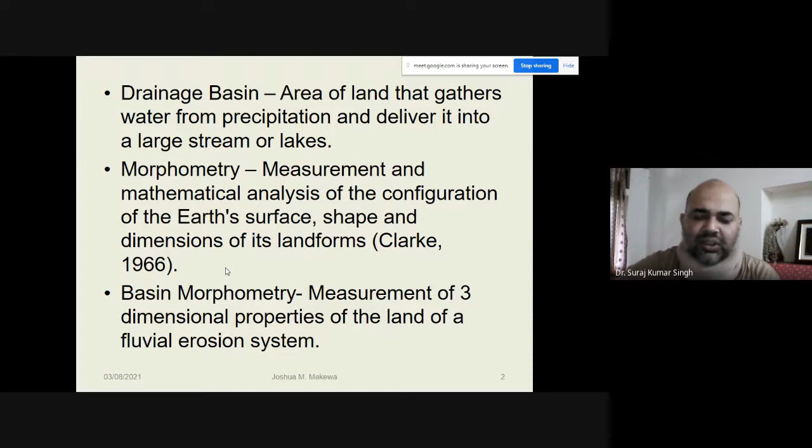So the variables that are very important to be studied in drainage morphometric analysis start with the stream order. Stream order is the number of smaller streams which are connected to the major stream or the main stream. Then the next variable is stream length. Stream length is the total length of streams, whether they are minor streams, tributaries, or the mainstream. We'll be calculating the entire length of each and every feature.

Then comes bifurcation ratio, where we'll be dealing with the number of streams of each order available in a particular river system: how many streams have stream order 1, 2, 3. Then we'll be calculating the stream length ratio, basin length, valley side slopes, basin area, stream frequency, drainage density, elongation ratio, circularity ratio, form factor, and relief ratio.

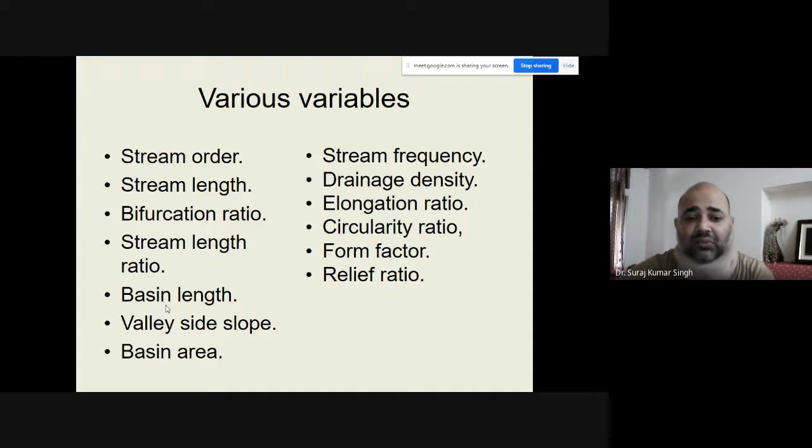These are the different variables that have to be analyzed in order to understand the drainage morphometry of a river basin. We'll be going into detail about the different kinds of variables in the coming slides.

Now, the morphometric features can be divided into three types. All these variables we stated in the previous slide can be divided into three categories. The first category is linear properties, which are in line, and those features are one dimensional. Then you have areal properties, which are two dimensional. And finally, the relief property. Relief means topography, means height. Whenever there is a height, apart from x and y, you need a z. That's why it is represented as 3D, or three dimensional.

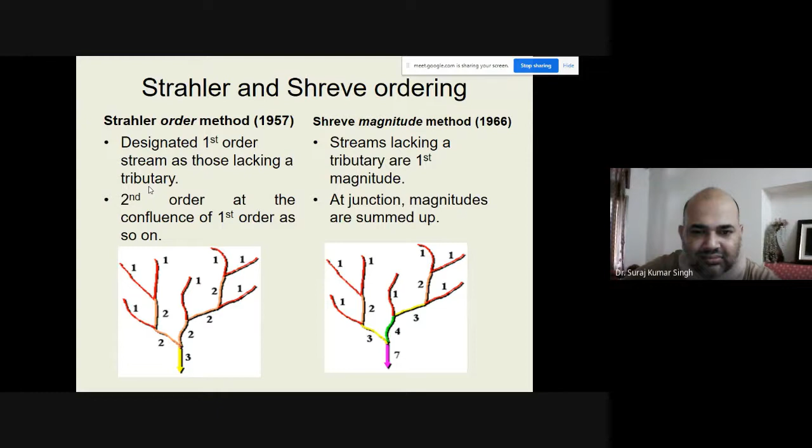Now we have provided order. Order is providing the name to each and every stream. How is the ordering done? Whenever two streams of the same order meet, it gets converted into the next order. If there is a lower order, you continue with the higher order. And whenever the same orders meet at a place, you convert that into the next order. That is the way you provide names to the stream orders.

Now stream numbers. What do you mean by stream number? Stream number means the total number of stream segments present in each order. For example, using the Strahler system, take order 1. We calculate the total number of order 1: 1, 2, 3, 4, 5, 6 and 7. So order 1 has 7 streams in total.

Now we'll go for order 2: 1, 2, 3, 4 and 5. So order 2 has 5 streams. Now order 3 is 1 stream. So whenever I check anybody's work, I can evaluate whether he has calculated perfectly or there is some misclassification. How will I judge it?

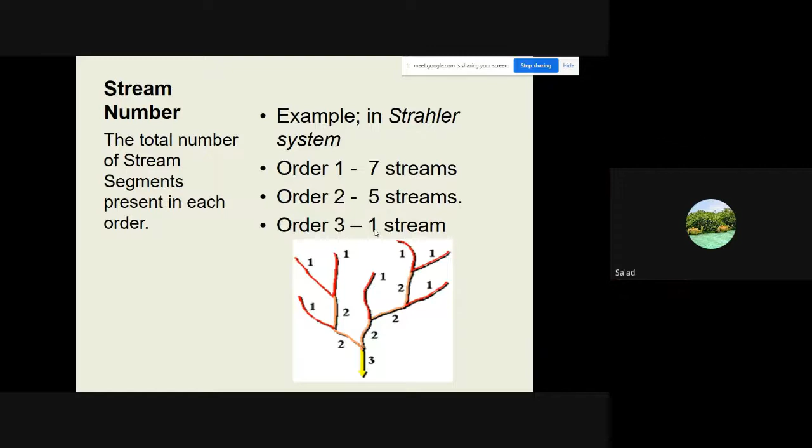Now comes stream length. Using remote sensing and GIS, we can calculate this length. Whenever you are tracing, mapping or digitizing it, as you have provided the projection system and the measuring unit, whether meters or kilometers, each and every length of each and every order is directly calculated using GIS software.

So using the GIS software, you can easily calculate the total length of stream in a particular order. Now, as we have calculated it, I know the total length of stream for order 1, for order 2, for order 3, and so on, until each and every stream is classified.

And what does it suggest? It reveals the surface runoff characteristics. So the prime focus for doing such kind of analysis is that during the rainfall, near to your houses, you will see something like a river flowing. There is a lot of water coming, and post monsoon there is no water. So what is that? That is excessive water that is beyond the carrying capacity of the land, and that is

denoted as runoff. Now because our population is increasing, because we are creating more cemented surfaces, this runoff has to be preserved. If you do not preserve this runoff, it will go and meet the oceans and your water table will not get recharged. So in order to get a recharge, you have to know the runoff characteristics.

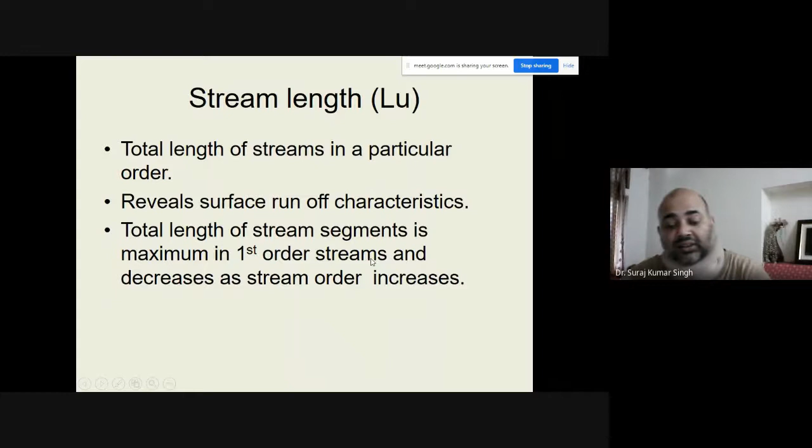For example, what is the total number? That is 7. And if the length is 11 kilometers, we'll be dividing that by that unit. So you will get the mean stream length of each and every order. Now the next calculation that we have to do is length ratio. So how will you calculate this length ratio? The length ratio means the ratio of the mean length that we have already calculated for one order to the next lower order of a stream segment.

So the formula here is the ratio of the mean stream length of one order to the next lower order. Means the stream length of order 2 will be divided by the stream length of order 1. This variation in sub-basins may result from the change of slope and topography. So here RL denotes stream length ratio. The formula is total stream length of order U by total stream length of the next lower order.

So you will take the stream length of order number 2 divided by the stream length of order number 1. Then the stream length of order number 3 divided by the stream length of order number 2. Getting it? Yes? Yes, sir. Anybody? Understood? Yes, sir.

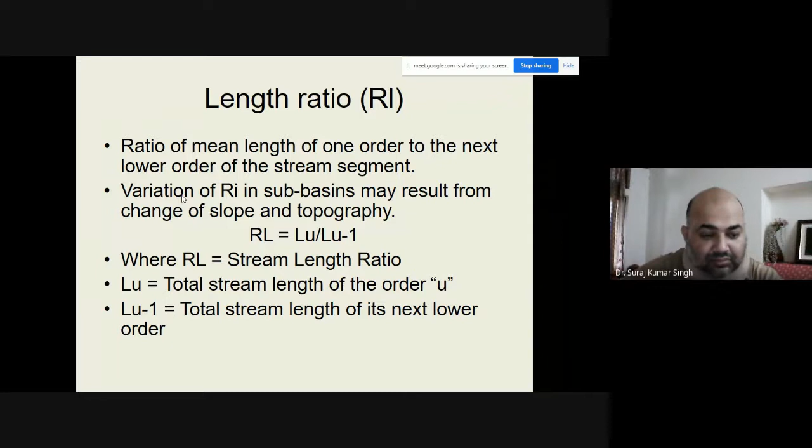Okay. Now next is bifurcation ratio. It will be clearer in concept when we do some exercises related to drainage morphometric analysis. So how is this bifurcation ratio calculated? This is the ratio between the number of streams in one order to the next higher order. So as we have done, we'll be dividing 7 by 5, 5 by 1. This is the meaning of bifurcation ratio: the ratio between the number of streams in one order to the next higher order.

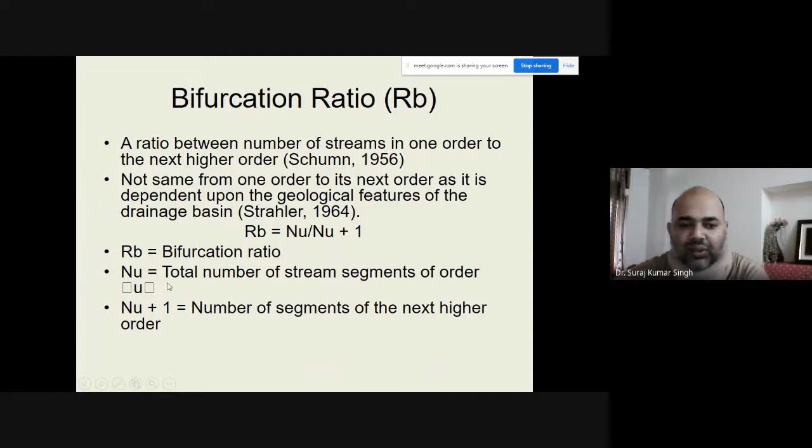It is not the same from one order to the next, and it depends on the geological features of the drainage basin. So what is the formula adopted for bifurcation ratio? That is the total number of stream segments of an order divided by the number of segments of the next higher order. Like, this will go back again to 7 by 5, 5 by 1. Getting it? Now this is how we'll be calculating it for the different stream orders.

So for calculating the bifurcation ratio, it is the number of streams of one order divided by the number of streams of the second order. So what was the number of streams of first order? That was 7. Now what is the number of streams in the second order? 5. So the answer is 1.4 for first order to second order. Now from second order to third order, what is the bifurcation ratio? That is 5 divided by 1, that is 5.

Now when it comes to mean bifurcation ratio, what do you have to do? You have to take 5 plus 1.4 divided by 2. Mean means average. So the total is 6.4, and the average will be 3.2. So the mean bifurcation ratio for the current example will be 3.2. Getting it?

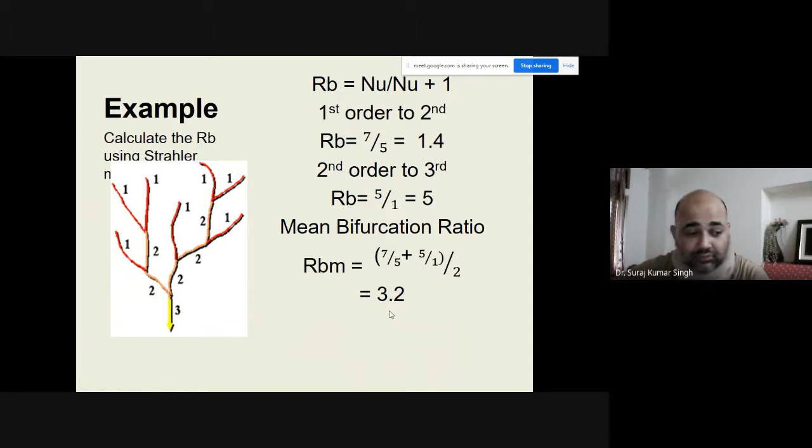Understood? Yes, sir. Yes, sir.

Now these were the properties that were made for linear properties. Now we'll be studying the areal properties of the different drainage basins. So what is the areal property? Areal property is related to the area. So whenever you are going for areal property, first you have to delineate the drainage area, that is AU. So what is the drainage area? That is the entire area drained by a stream or system of streams such that all stream flow originating in an area is discharged through a single outlet.

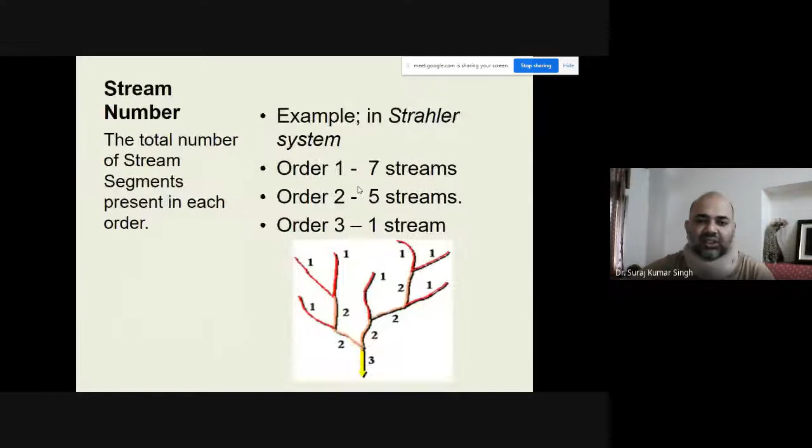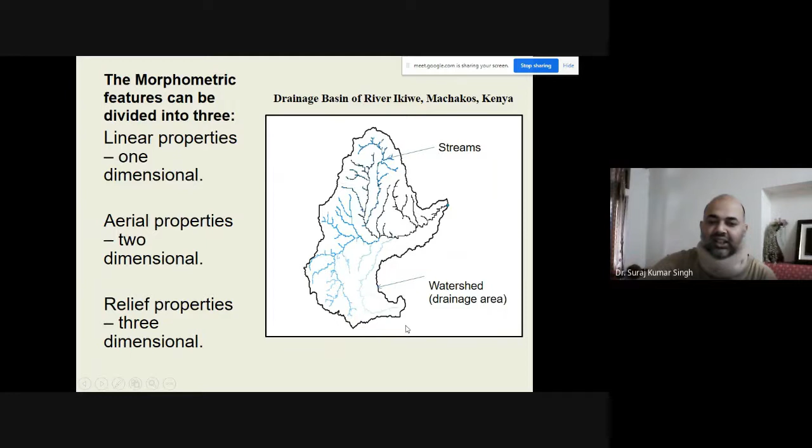Now what is this? I'll go again to this figure. This is the outer boundary that we have created. So this is what we are trying to calculate in areal. This is the area that has to be delineated, and this is known as drainage area. Okay, got it? So we'll be calculating the drainage area first, then we'll be calculating the drainage density. So drainage density is the expression of closeness of spacing of channels.

So whenever flood pictures or videos come up from Himachal or Uttarakhand or Jammu Kashmir, and then you see a flood of UP, Bihar, you'll see the intensity of the rivers is quite less in the plain areas when compared to the hilly terrains. That is because the drainage density is very high in Himalayan terrain when you compare that with the plain terrain. So drainage density is the number of streams. The more dense the streams are, the more runoff it will create. The lesser the number of streams, the more spacing, and that's why the intensity will be less.

Now, what does this drainage density provide? It provides a quantitative measure of the average length of stream channels of the whole basin. So the formula we'll be using to calculate drainage density is the total length of streams divided by drainage basin area. So if we calculate that, we can calculate the drainage density.

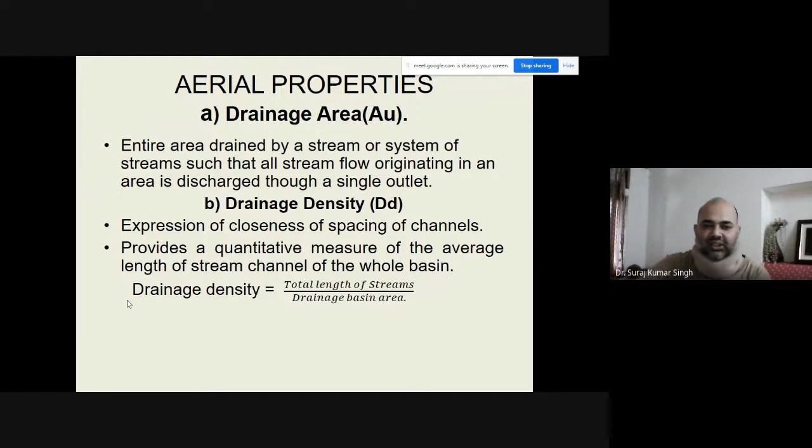Now the third one is stream frequency or drainage frequency. It will be easier to understand. Drainage frequency is the number of stream segments per unit area. Just like you can say population density. So if you say 980 persons per square kilometer and 500 persons per square kilometer, it means the total number of people residing in that given area. So in case the population density is high in any area, if there is a disaster, the damage will be very high where the population density is high, because the number of persons living in that area is high.

In the same way, if the drainage frequency is high, it suggests that the number of streams or rivers generating water is of intense quantity. So the stream frequency formula will be the total number of streams of all orders available in a particular area, per square kilometer. A higher drainage density may imply an increased stream frequency.

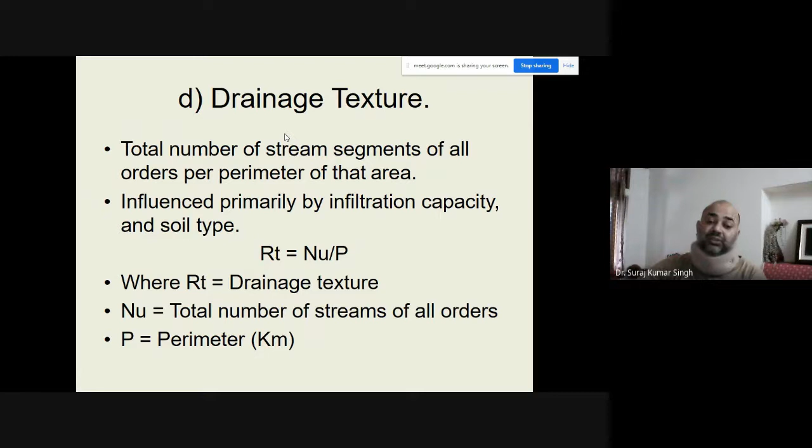Now next is drainage texture. So what do you mean by drainage texture? Drainage texture means the total number of stream segments of all orders per perimeter of that area. So for texture we are not using the area, we are using perimeter, and it is influenced primarily by infiltration capacity and soil type. So the formula to calculate drainage texture is the total number of streams of all orders, 1, 2 and 3 for the current example, divided not by the area but by the perimeter. For drainage frequency we were dividing by the area, for drainage texture we are dividing by the perimeter. Getting it? That is in kilometers, and the previous one was in square kilometers.

Now the next important variables that have to be calculated are circulatory ratio and elongation ratio. So what is the difference between the circulatory ratio and elongation ratio? The circulatory ratio is a quantitative measure for visualizing the shape of a basin. By seeing the shape, you can visualize the shape of the basin, whether that is a round shape, whether that is a triangle shape, whether that is a

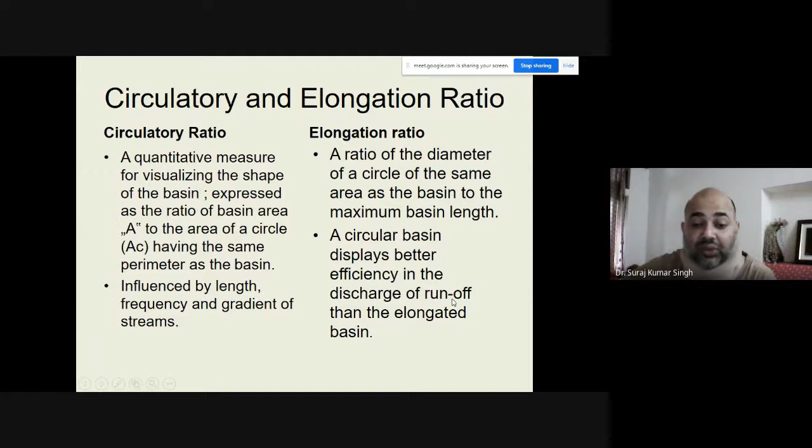rectangular shape, and it is expressed as the ratio of basin area to the area of a circle having the same perimeter as the basin, and this is influenced by length, frequency and gradient of the streams. Now it comes to elongation ratio. Elongation ratio denotes a ratio of the diameter of a circle of the same area as the basin to the maximum basin length. A circular basin displays better efficiency in discharge of runoff than an elongated basin.

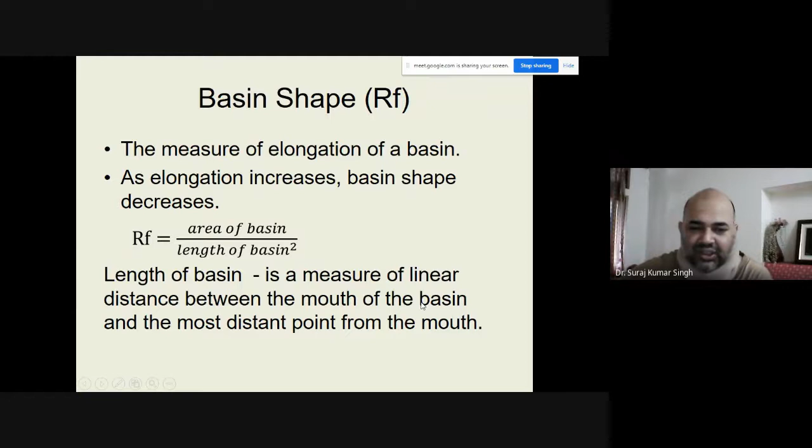Now comes basin shape, how the basin shapes look like. The basin shape is a measure of elongation of a basin. As the elongation increases, the basin shape decreases. Means if it is more elongated or more circular, the density will be less, and if it is small, the density will be high. Now, the length of a basin is a measure of linear distance between the mouth of the basin and the most distant point from the mouth.

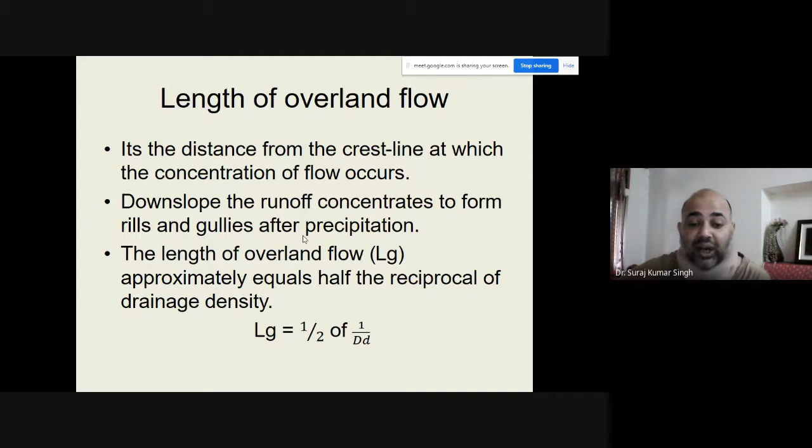Now, length of overland flow. So, what do you mean by length of overland flow? It is the distance from the crest line at which the concentration of flow occurs. Downslope, the runoff concentrates to form rills and gullies after precipitation, and the length of overland flow that you see during the monsoon period is approximately equal to half of the reciprocal of the drainage density.

So these are all the parameters that were related to the shape of the basin. So whenever you are creating, you have to calculate the drainage area, then you have to calculate the circularity ratio, then the elongation ratio, you have to calculate drainage density, drainage texture, and stream frequency in terms of areal aspect.

Now, the third aspect on the basis of which we'll be performing the drainage morphometric analysis is basin relief. So, what does basin relief suggest? It is the elevation difference of the highest and the lowest point of the valley. Generally for this we have got various kinds of digital elevation models available in remote sensing and GIS, where the information about the terrain, the topography, the relief is available at different resolutions free of cost for the entire globe.

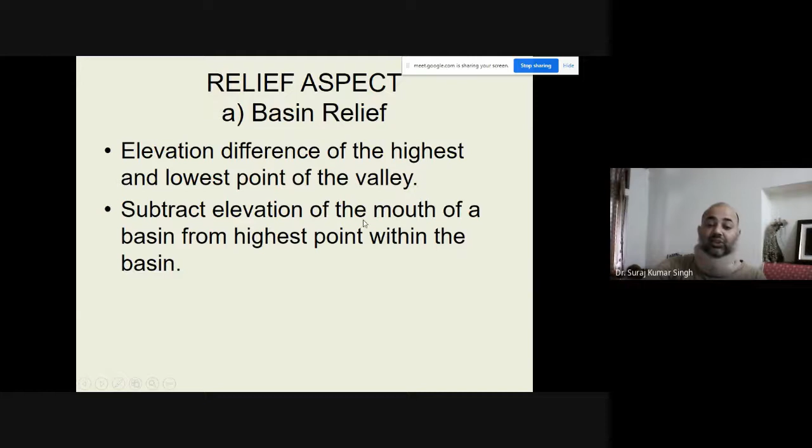Now, the resolutions available range from 1 meter from Cartosat to 30 to 90 meters for SRTM DEM or ASTER GDEM, that is Global Digital Elevation Model with a spatial resolution of 30 meters. Using those digital elevation models, you can easily calculate the difference in elevation from the highest point to the lowest point in the valley. What you have to do is subtract the elevation of the mouth of a basin from the highest point within the basin.

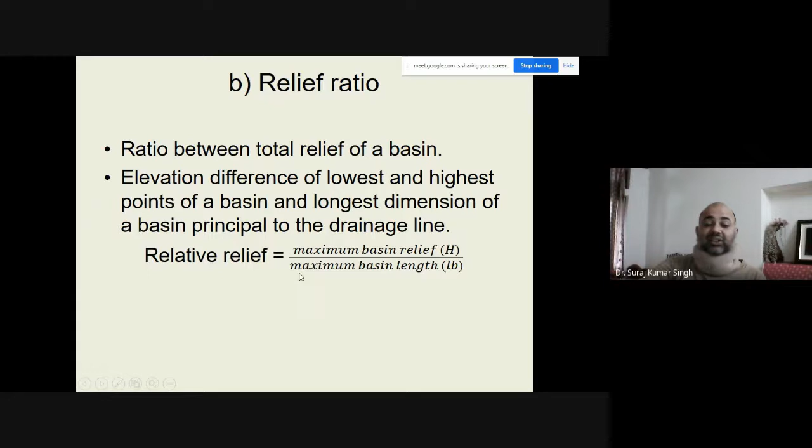Now the second important parameter that has to be calculated is relief ratio. So what do you mean by relief ratio? That is the ratio involving the total relief of the basin, what the topography of the basin is. It is calculated as the elevation difference of the lowest and the highest point of a basin and the longest dimension of the basin parallel to the drainage line. So the formula used for calculating the relief ratio is the maximum basin relief divided by maximum basin length.

And at last, we can conclude on the basis of all these linear, areal, and relief parameters that morphometry is essentially quantitative, involving numerical variables whose values may be recovered from topographical maps. That's why whenever you are going for drainage morphometric analysis, you have to take satellite images, topographical sheets, various digital elevation models, and various Survey of India maps of different scales for the entire mathematical calculation, because whenever it comes to runoff, to water, that is a unit that comprises area and volume, and the relevance of morphometric variables is therefore for comparison and statistical analysis.

So whenever you are doing such kind of analysis, you have to use the different data sets, whether from satellite images or from topographical sheets. You have to use all these data sets and images for calculating this drainage morphometric analysis. And with this, I'll end my today's presentation.